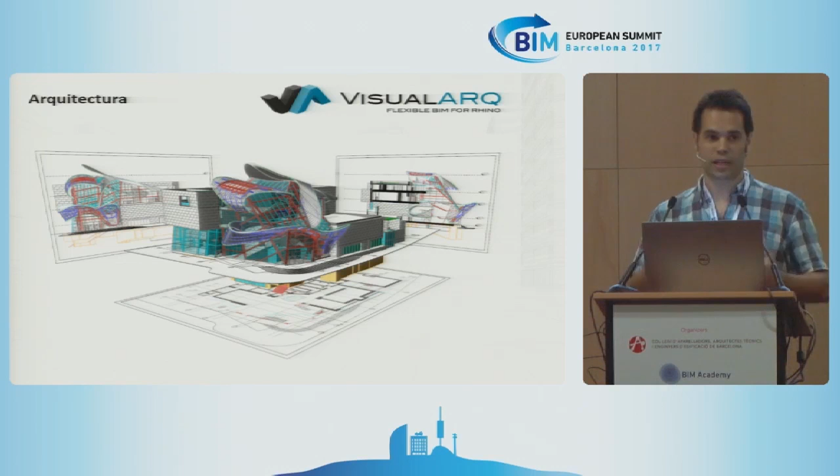Well, thank you very much, Oscar, and also to the organizers for allowing me to be here and to share with you VisualARQ. It's a program based on Rhino, and I'm sure many of you are already familiar with it, and also Grasshopper. For those who don't know, Rhino is a 3D modeling platform that is useful for other developers to add more apps and functions. These may be apps for architecture, imaging, anything. Basically, Rhino is used in very different fields, from industrial design, boats, jewelry, cars, furniture, animation, shoe wear. So it goes from very small objects such as jewelry up to huge projects such as a building. So here you can see these functionalities of this platform that allows you to extract all the documentation regarding a project.

Why BIM? Well, because it comprises all the documentation, and all the documents are generated by or based on 3D models. Also, parametrical architecture objects, so we can list them and know how many of them are there, the volume, sizes, and so on, and add new information on each of them. It is more practical to work with these parametrical objects and say, I want it to be 3 meters long and not 4 meters long. And this is an improvement. Also, Rhino allows for model exchange through the ASC format or IFC format.

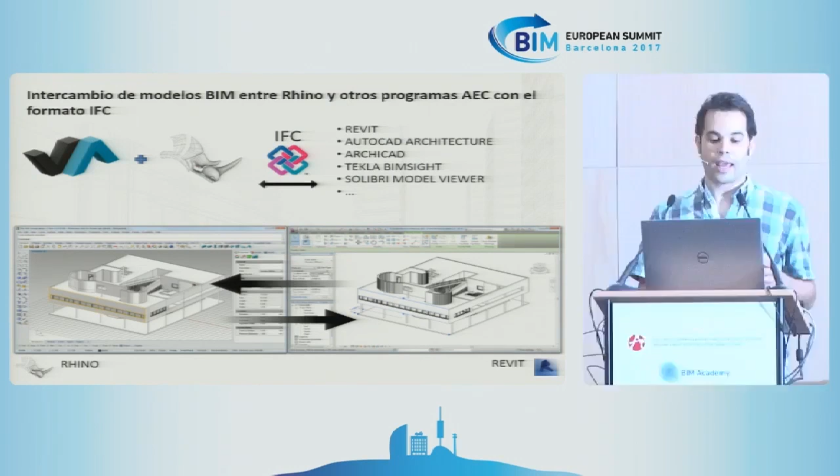I'm sure you are already familiar with that. So you export that to the IFC, and Revit identifies columns and models as native. So the workflow is very useful to begin modeling in a very agile way and for more complex models in Rhino, and to translate them to Revit so that other teams can work on them.

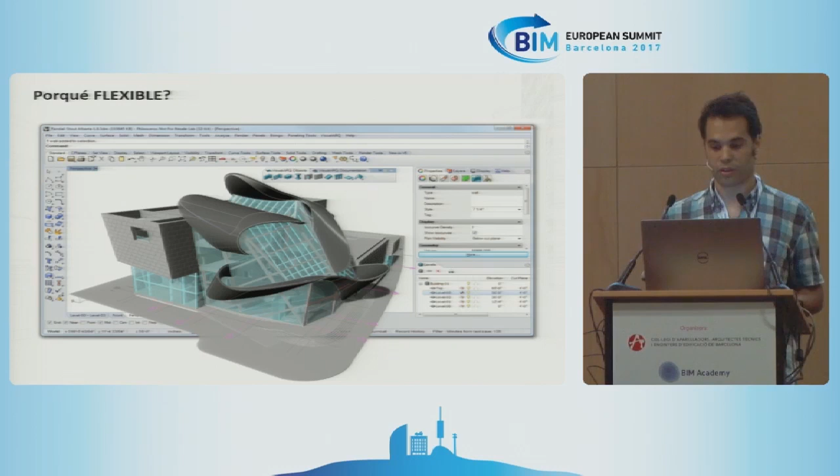Why do we talk about flexible BIM? Because we work with flexible and complex shapes. With very few control points, we get full precision. So this is used in construction for modeling shapes that are later 3D printed. And it's also very useful for complex geometries. Flexible also, actually, for the ones not familiar with Grasshopper, is a visual algorithmical editor, and VisualARQ is integrated in Grasshopper. All the objects of VisualARQ can be created from Grasshopper. In this example, you can see a routine, a general routine in Grasshopper, and from a solid you get the height, and it's divided into a number of points. A plane is set into each point and generates an intersection with the original solid.

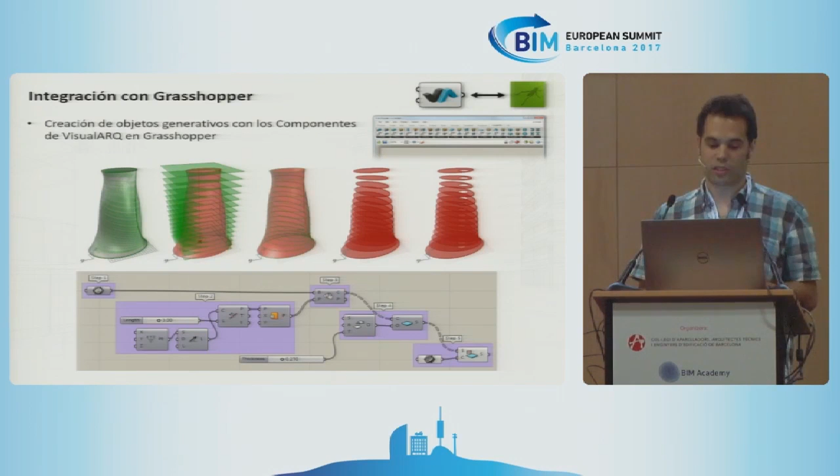From here you get the lines around this object, and this means that in a very simple way we can divide a solid object into different levels or stages or floors. And you can create your own tools and routines of this kind of geometry. So the power of Grasshopper is huge when it comes to modeling. I will be showing some live examples for you to get a better impression on that. Another useful function in terms of IFC, on the one hand, we have normal objects such as walls and partitioning, but we can also create solids as this one, which has a more complex shape, and at any time you can assign information and data to that, like make it a forge, for instance.

So we can say that this has been a forge. We add a kind of comment or tag, and later on you can retrieve this information. This applies not only to objects per se, but also to any kind of geometry in Rhino.

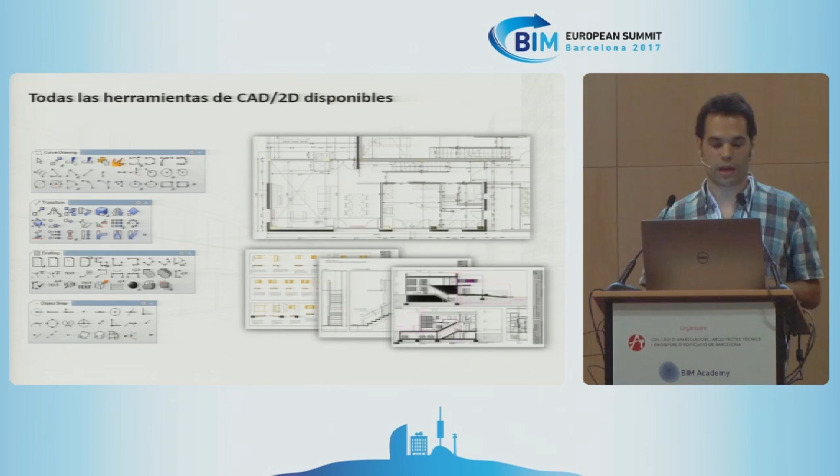It also has available all CAD or 2D tools, and finally, all the tools for architecture visualization, renderizations, and photorealistic visualizations.

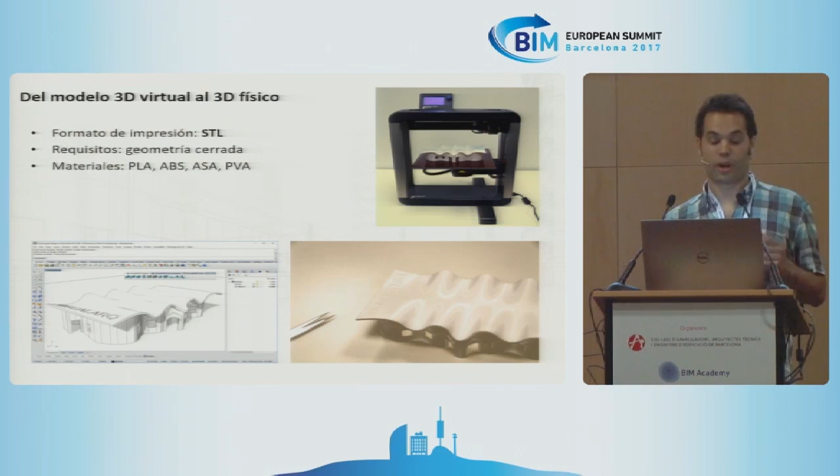One of Rhino's applications is to elevate these models for 3D printing. At the end of the day, what you need is a closed surface, a closed solid, so that the machine reads it as such. VisualARQ objects can be converted, and with a Boolean union, you can convert them through the STL format, which is the most practical, and bring it to the 3D printer.

I would like to show you some of the novelties that we recently launched, because I believe them to be really handy, especially if you work with Rhino and different levels.

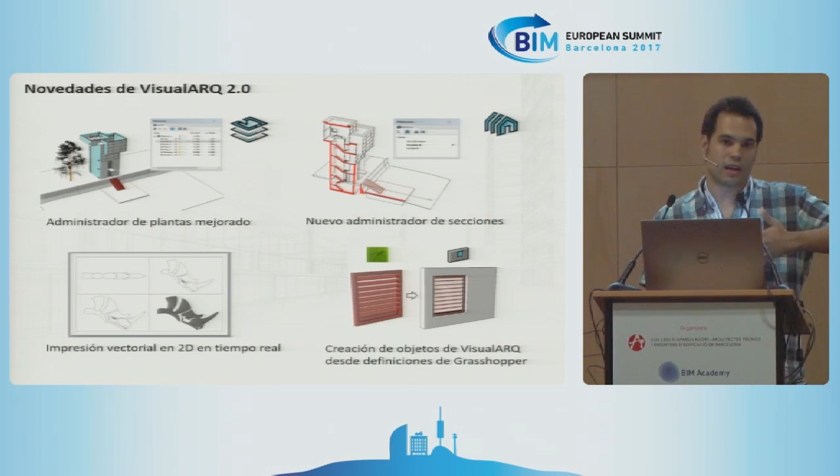I would like to highlight, especially in this new feature related to integration with Grasshopper, the ability to create architectural objects from Grasshopper, translating and transferring this flexibility through the dialogues of VisualARQ, for them to be more user-friendly and to have a vast library of objects.

We continuously add new objects, both in 3D and on paper or 2D. And as I said at the beginning, you have the possibility to add any kind of information to any object, creating new parameters such as price, provider, thermal transmission coefficient, and so on. Anything you want to invent or create, you can complete these objects with further information.

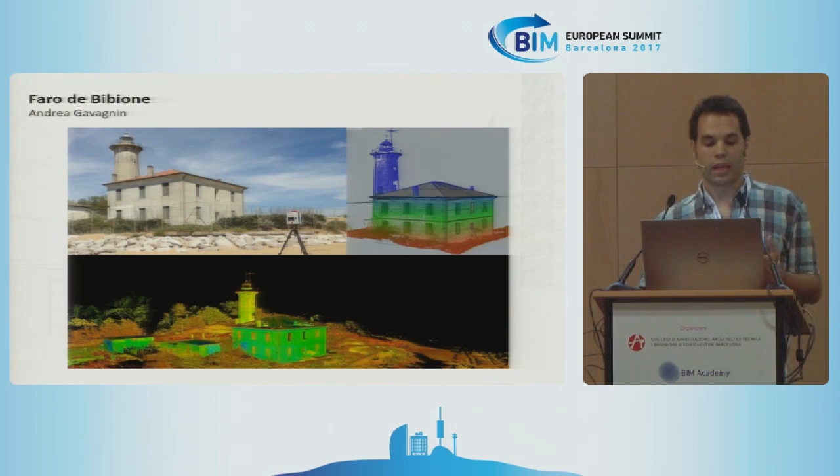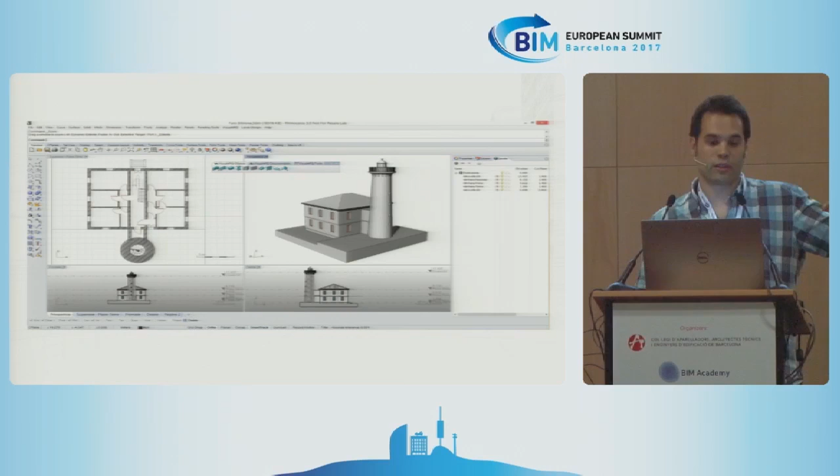I would like to show you some real cases completed with Rhino and Grasshopper, two very different platforms. The first is a project on an existing building in Italy, where this building was scanned through a 3D scanner. They obtained the point cloud through a Rhino plugin, and with VisualARQ objects, the model was built to get a BIM model delivered to the client, the town hall of the municipality of this lighthouse. The rest comes in automatically.

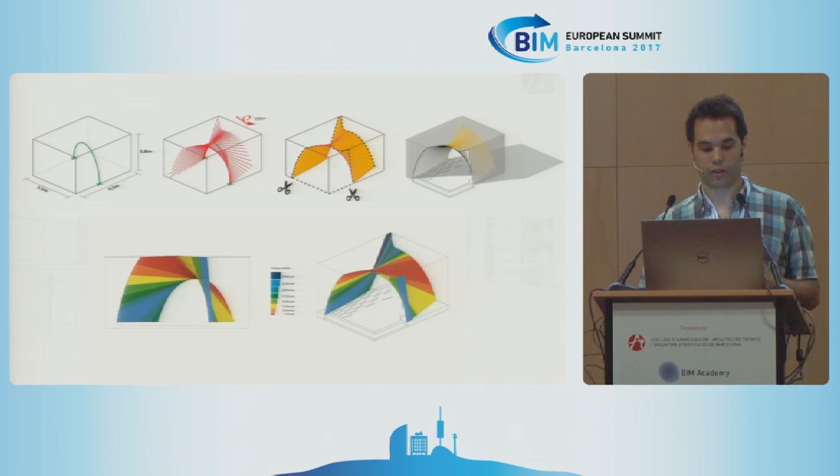Another example, changing the scale and kind of project, is this pavilion in Norway, which shows quite clearly the whole process from the design. Grasshopper is quite widely used in design. Through different values and parameters, you can get information from other components, and also draw diagrams to optimize construction. Here are some views of this pavilion. We applied VisualARQ to get all the plans and sketches, some pictures of the construction process, and the final result.

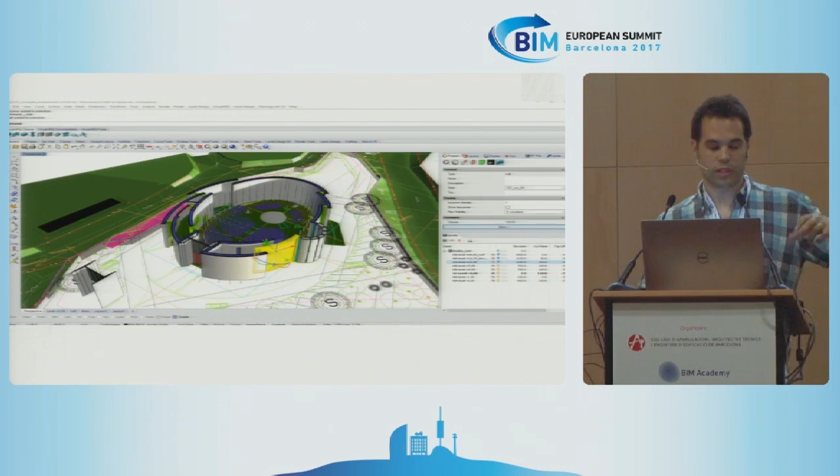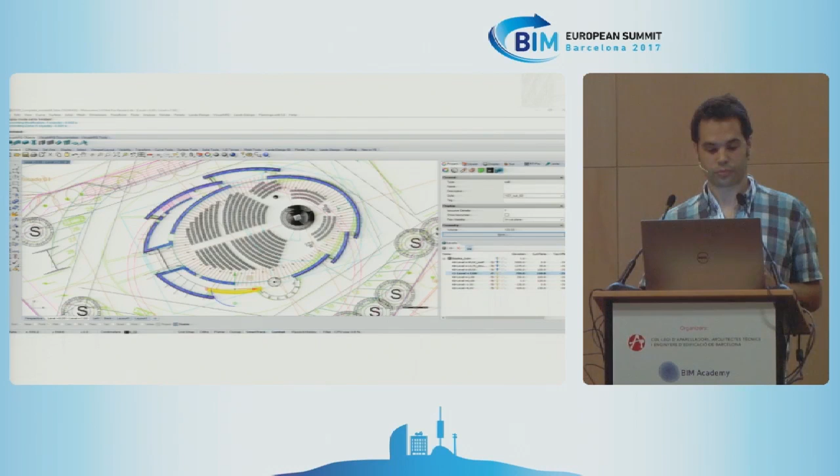Another example is a church in Croatia, currently under construction, created completely in Rhino and VisualARQ. We were able to work at different heights and stages, which was extremely useful for the architects. They could assign different kinds of partitioning and walls, working at different levels with corresponding graphical representation. Here we can see comparisons between reality and the graphical views.

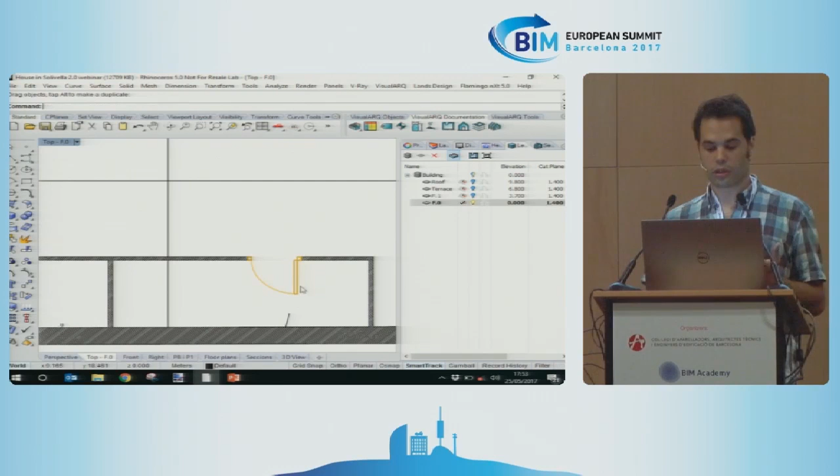Here I have a door, I can move it around, change its location, etc. I double-click to change the floor I want to show. And if I work from this view, it seems like a 2D representation, but it's not. This top view actually makes our life very easy.

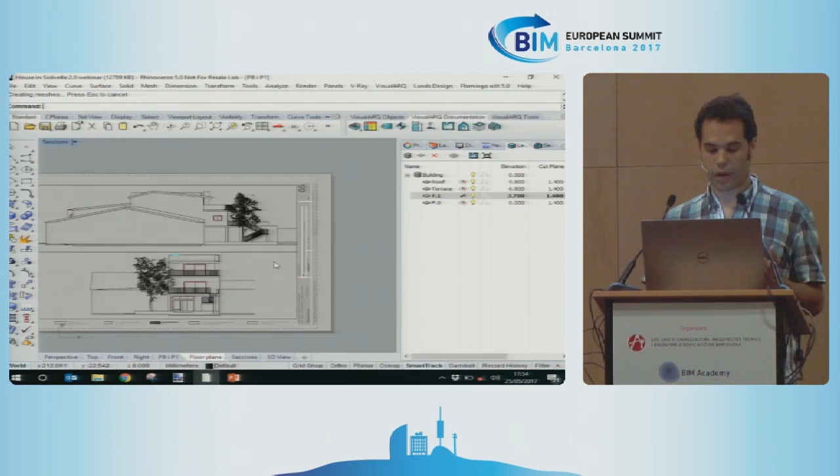There's also a section administrator or manager, so we can define different regions and sections and switch from one to the other. We prepare the different floors on paper and choose which floor to show, the ground floor, first floor, etc. The same applies to sections, let's say section B, A, or C.

We don't have to worry anymore about the 3D in these views.

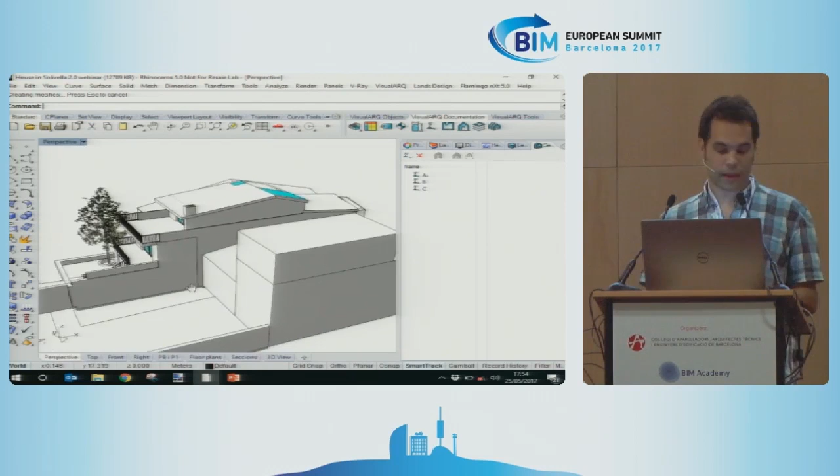Finally, I'd like to show this integration to Grasshopper that we currently develop. So I open Grasshopper. This garage door, for instance, cannot be created by VisualARQ. There's an option to assign 3D blocks to certain objects, but that block is static, not parametrical. In this case, for a garage door, if you want to have it, you have to use Rhino to create some blocks. So what we've done is develop the possibility to create it in Grasshopper.

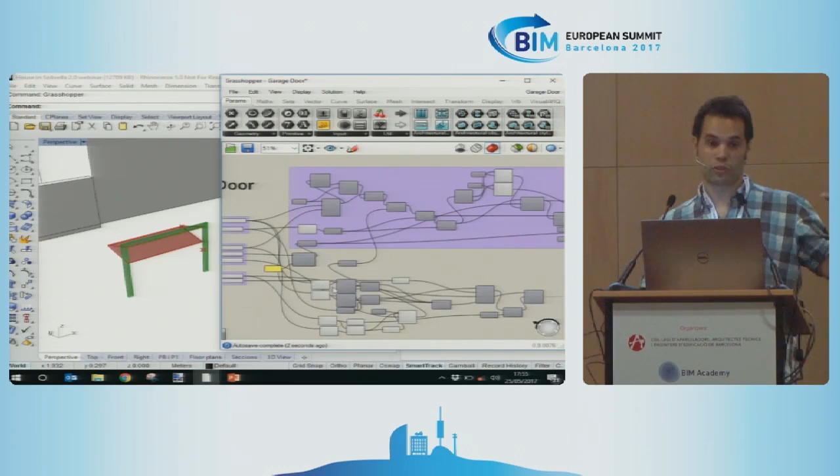Here we set the width and height, the opening - those are the input values. Finally, we have two geometrical components, the leaves and the frame. I click save on this definition.

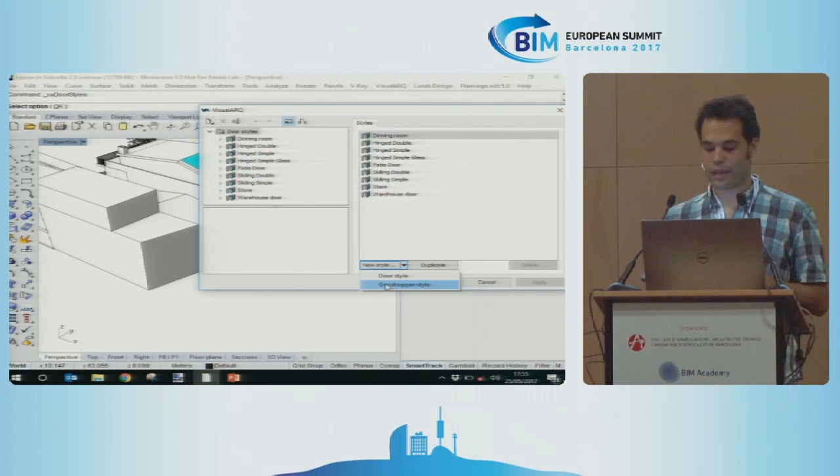And now I create a new door style. Here you can see there's a conventional door and the option to create this door from Grasshopper. So I select the file I just saved. This geometry is actually created by Grasshopper behind the scenes, even though we don't see it, using the geometrical components we included in the definition.

Here there's a list of all the parameters that define this object, and for each of them we can choose if they are editable by definition, style, or object, or just hide them, because some are just figure-related and not interesting for any particular case.

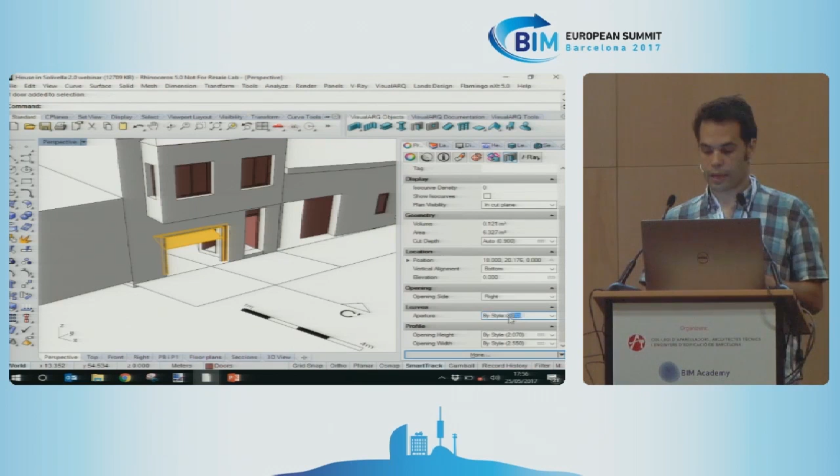Once we complete this process, this object is at our disposal and we can include it in our model. We can take a look at its properties and see they are the same as what we defined for the object. We can also modify it if we wish. This provides full flexibility to create any objects we want, freely and with no design constraints.

So I have no more time left. Thank you very much for your attention, and thank you very much.

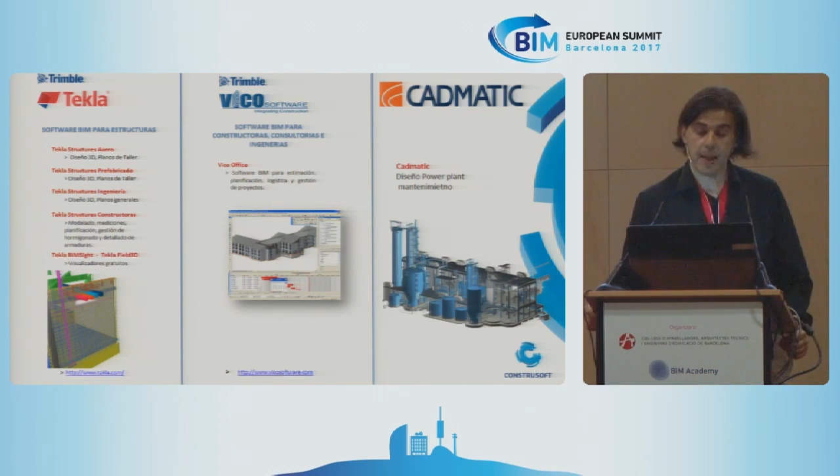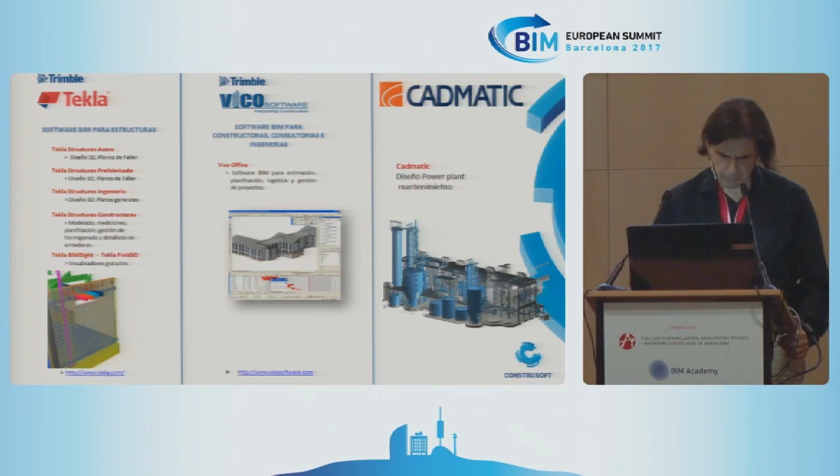We have always been related to the structure sector. There are three parts. We have been working with BIM since 1995, even before the actual BIM denomination was created. We work with models, that's Tekla. The part of managing structures, that's Tekla. The part that deals with 4D and 5D is Vico. And we have also added another software to our portfolio for industrial plants, that's Cadmatic.

We have six things I would like to talk with you about. Do you think that BIM and productivity go together? Is it the same? If I work with BIM, am I more productive? We'll talk about it later. We will also analyze a very simple work site. The following question is, who must perform the model? And most importantly, who must pay for it?

We have offices in Lima, Bogota, Santiago de Chile, Barcelona, Madrid, and many clients say, well, we are not paid for this, who should do that? And many times we don't really talk about who should pay for the model.

We will also talk about, as Oscar mentioned, I got a certification from Stanford in VDC, and Martin Fischer, who was a professor of mine at Stanford, will be here tomorrow. You cannot miss his presentation. So we will talk about how we work with virtual design construction. Also, we will talk about information for the construction company, and we will cover some already performed experiences in America.

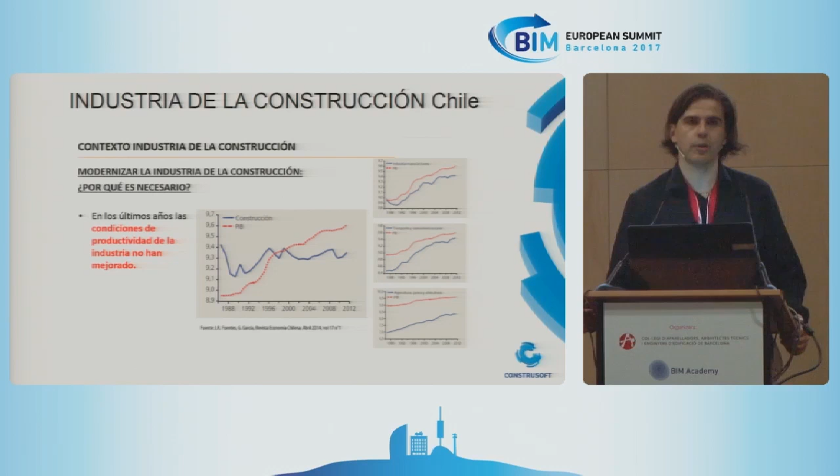So let's cut to the chase. BIM and productivity. The Chilean government actually carried out an analysis, and we see the blue horizontal line. We see that productivity does not really grow, but other sectors are growing. So why don't we have more productivity in construction, when other sectors do?

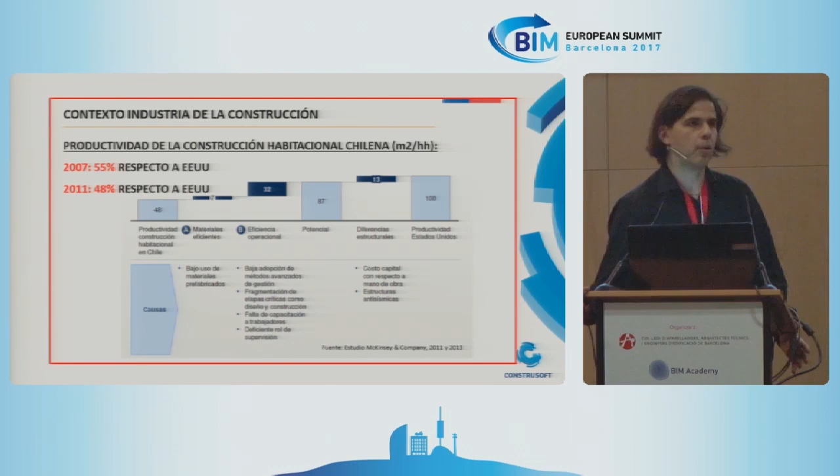Then they compared it to the United States. In 2007, we assumed that if the United States had 100 units, Chile had 55. We checked again in 2011, and we went from 55 to 48. And they wondered, why is this happening?

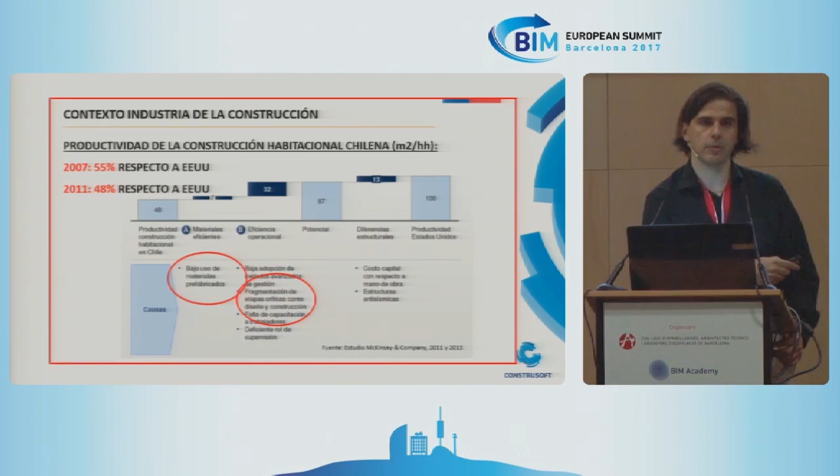The conclusion is that we need to prefabricate, and also they concluded that if information is segmented and fragmented, it does not work. So if you use any platform, the coolest 3D system, but you end up working with paper, you will have the same productivity as 50 years ago. Maybe you'll get better products, but the productivity will be pretty much the same. So if we use paper in any of the stages, we are back to the same productivity as 50 years ago.

Let's focus now on a very complicated and complex project. Think about it. Okay, there we go. This is a home center item, such as IKEA furniture. I put that together with my mother-in-law. We got along really well, so it was not really a risky project.

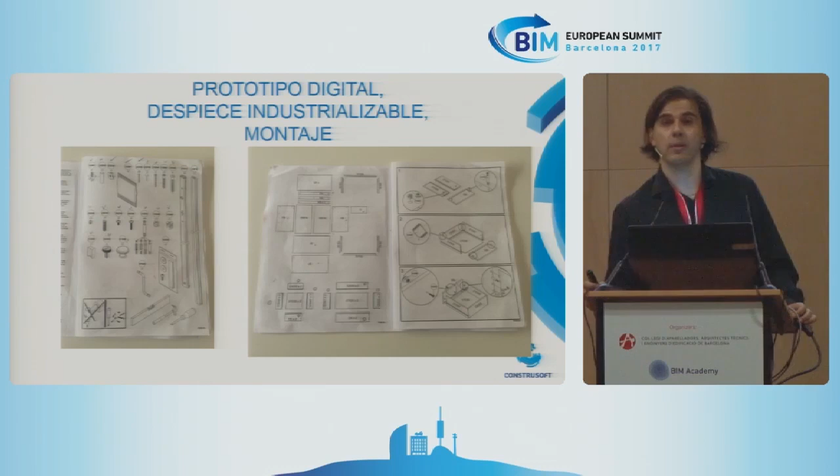But, you know, after we finished, I needed exploded drawings and also mounting instructions. Without the instructions, maybe we wouldn't have been able to do that. So imagine, if we need all the instructions in great detail for such a small thing, don't you think I will need the same for building a hospital, an airport, or anything else? And the answer is yes.

Do we have it? The answer is no. So basically, we are reaching a compatibilization model. We have a clash detection system. That's great. But it's like if we only had the 3D model for the furniture we put together. We also need the bolts and we need the mounting instructions.

We think that traditional BIM is cool. The platforms that are doing that are great, but we need to move further. We need to go beyond that. We need to have more detail. Maybe we can reach up to level 400, 450, so that we have all the information, and it goes from the model to the machine.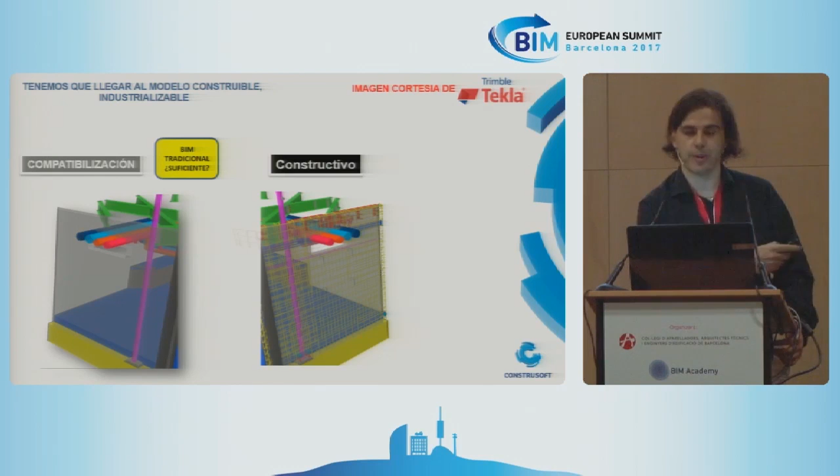Then we will change our productivity when compared to paper. So I would like to have the I of BIM, not only for information, but also for industrialization. That's the workflow. Tomorrow we'll hear about similar things, but when we talk about level 300, we are doing traditional BIM. As I was saying, we think this is what we need to achieve, where the subcontractor works at a very detailed level that allows us to bring the fabricated piece with a barcode, so that we can just put it in the right place and be much more productive.

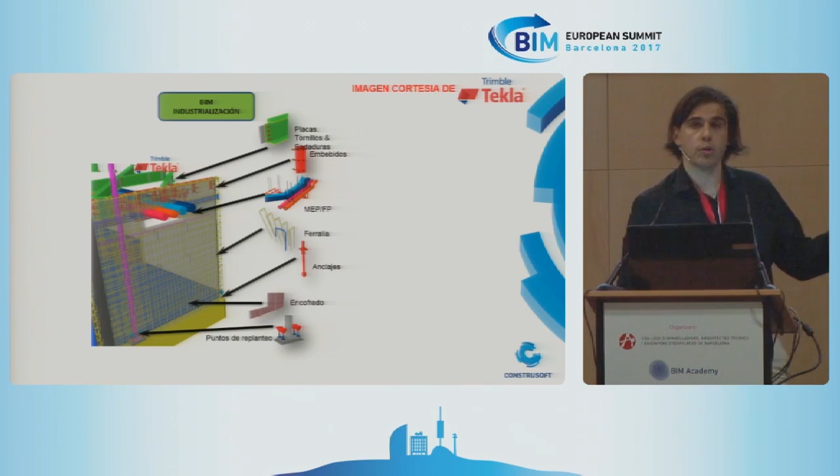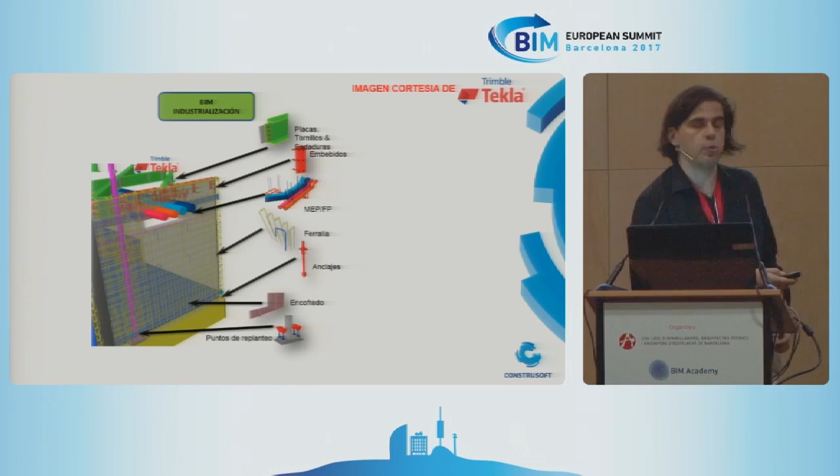So we will have all the embeds, all the installations, all the MEP, all the reinforcing steel, the anchors, all the rebars. If we have all this information, we not only have it from the beginning, but we have everything we need to plan the work the best way. Also, in the United States, they have the BIM tool that gives us layout points to check if the BIM is being used well or not.

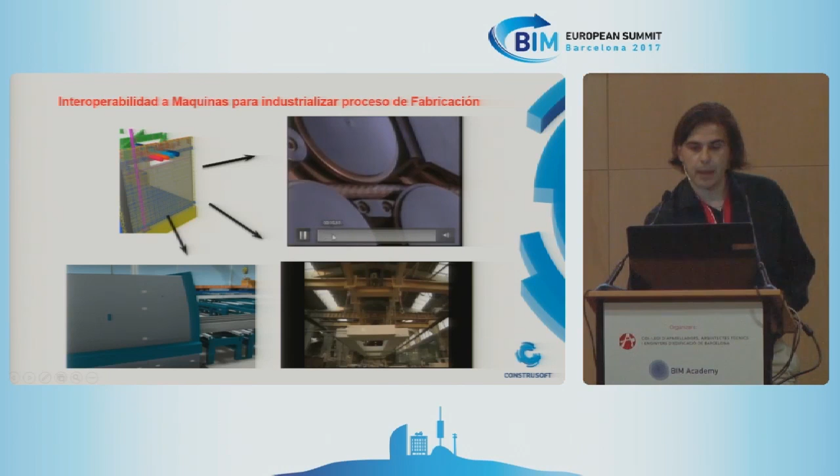For many years, our software has dealt with this structure, but for any specialty, we need to do the same. We need to achieve a constructible model, and hopefully also an industrializable one. From the model, we are able to reach the point where we can build the different components.

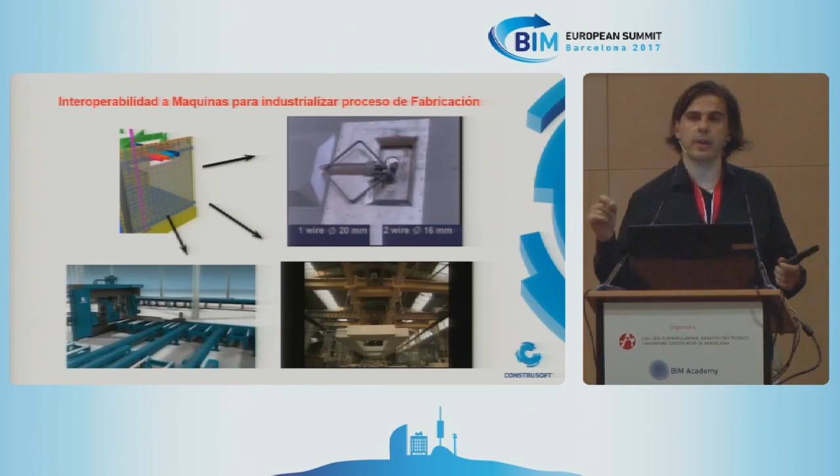A person can do 50 of these pieces a day, but the machine does several per second. For example, we can also have other clients in the steel industry. In this industry, each machine is connected with Tekla, and when we start working with the machine, we see that it already knows what needs to be done, and it's very precise. It's almost like playing with Lego.

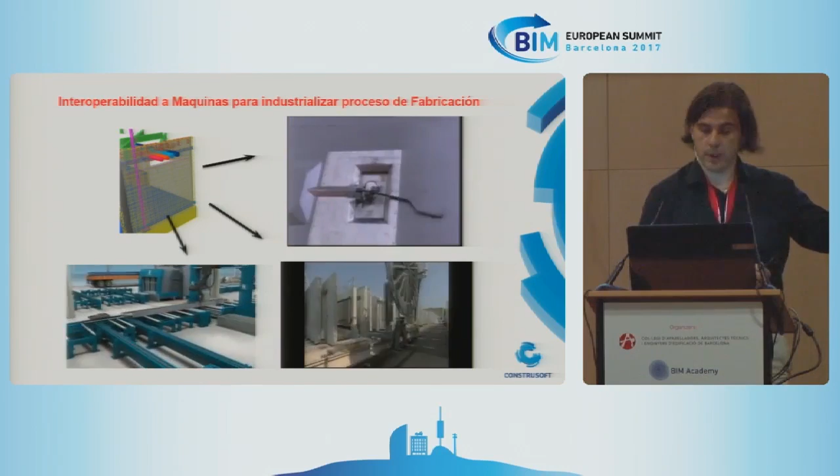Also, when we work with prefabricated concrete, it works just as well. In the past, we worked with paper, but now we're working with different prefabricated elements. So we listen to the diagnosis done in several countries so that we have larger productivity.

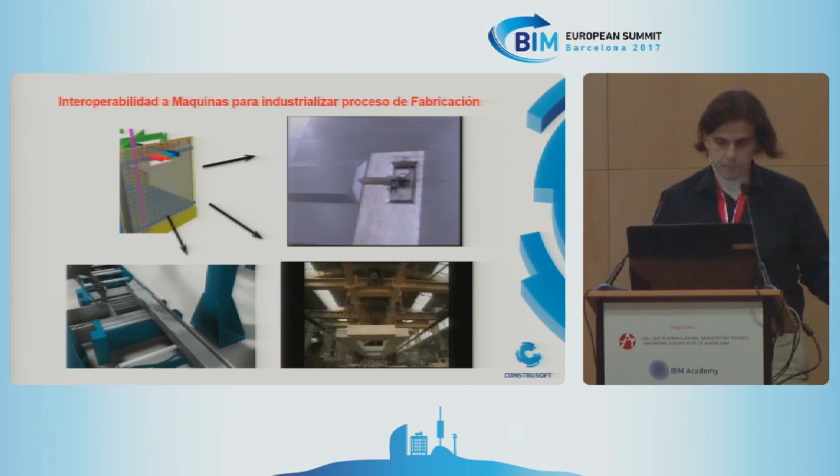Here, for example, we know exactly where the piece goes. We just put it together, we mount it, and that's perfect. The on-site work can last months, but the prefabricated work can just take some days.

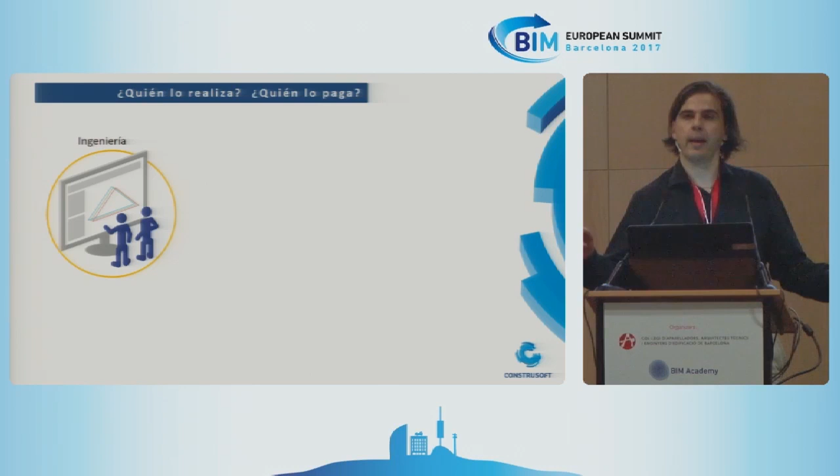So who pays for these? If we industrialize, we're more productive and it will work out fine. But who pays for that, and who carries out all the work? We have three possibilities: the engineering company, the provider, or the subcontractor.

Sometimes the engineering company does very high quality projects and we're done. But what happens is that many times engineering companies say they are not paid for that, so they don't want to do it. The construction company needs information to work faster, and the industrial side also needs information to work faster. So who pays for it?

In some countries, like the United States, the contractor pays for it willingly. But in our country, for example in Spain, we don't do it this way. Maybe we have the money to do the clash check, but that's pretty much it. So with construction companies, we see that 75% of the money goes to subcontractors.

It could make sense to say: I will pay you as much money, but I don't only want the project, I want the model, and I want it well performed, and I want to show how your product was done. That model will be useful for me to create other projects. In the countries where this is done, it works great. So we think it could be a good idea that the subcontractor does this work, not as an additional service, but just as added value. Do you think that could work?

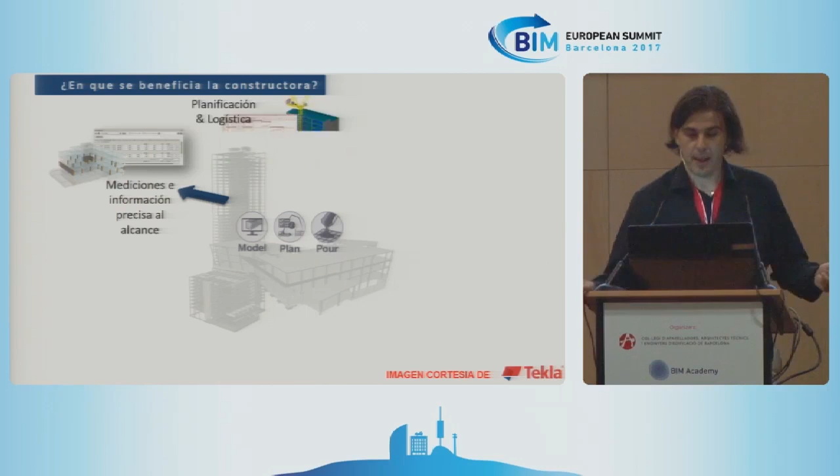Afterwards, I can do really good planning. Just by using barcodes, I will know where each piece goes. I will also be able to plan, and know what is needed every day on site. I can also do that with a 4D tool. I can plan when the concrete trucks will come, and I will know where the reinforced concrete must go.

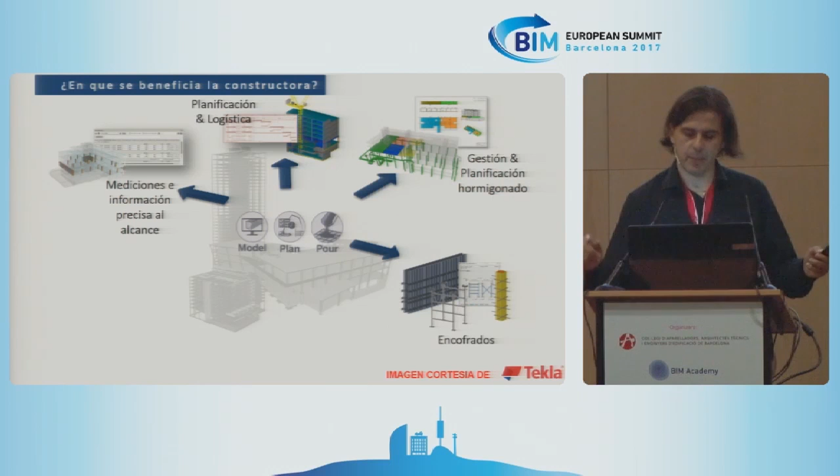The rebar is also important. I'm running out of time and I still have a lot to say. With the rebar, if I know where each rebar goes, I will not lose any part. So the idea is that we need to have everything really well defined, so I can just put the pieces together like when we play with Lego.

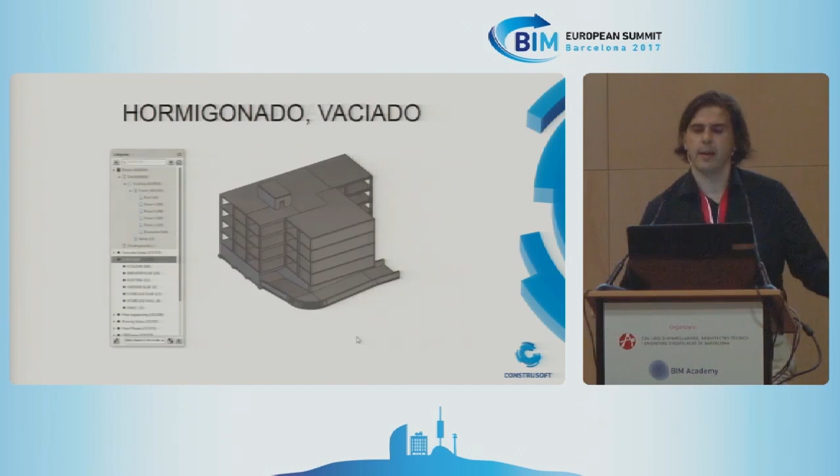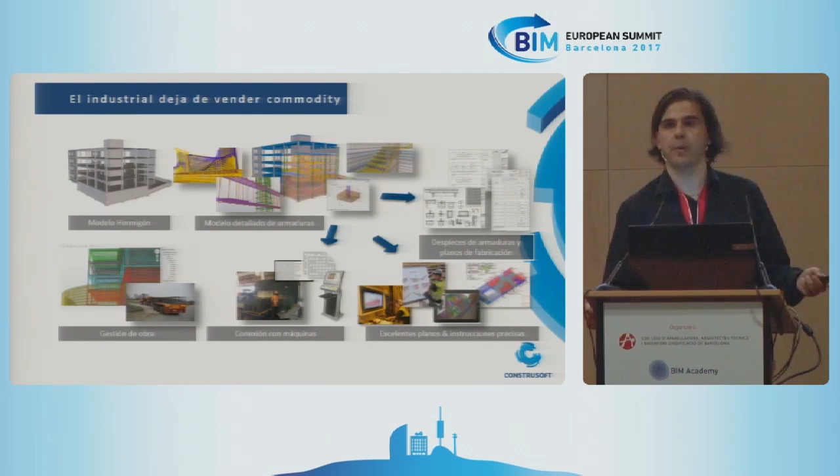With pouring, I can determine what I'm going to pour every day. Also with rebars, instead of having papers that really don't give me much information on where each element goes, these rebars show me a lot of information, and we save a lot of money. Here we have the production workflow from modeling up until the just-in-time delivery of the material we need, with the quality we need, at the moment we need it.

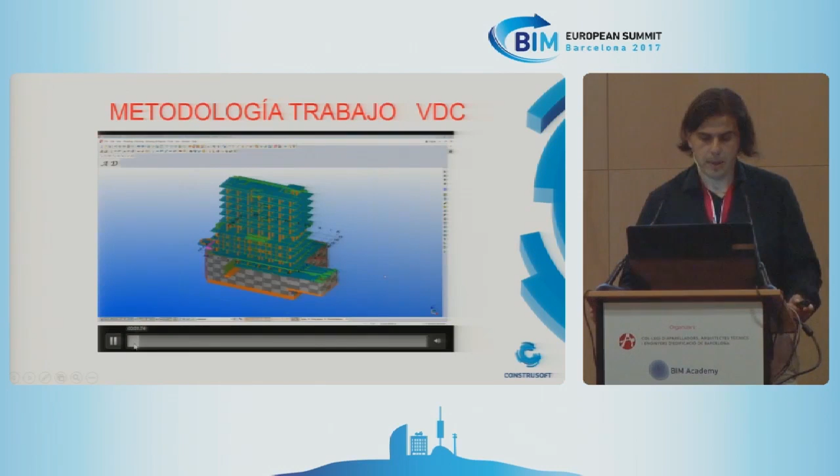Based on the Stanford system, we start with a clash detection. We do the modeling and we have all these specialties. We need to make sure everything is working out fine. Once we are there, we need to make it compatible. We will have the RFI. And just a little piece of advice.

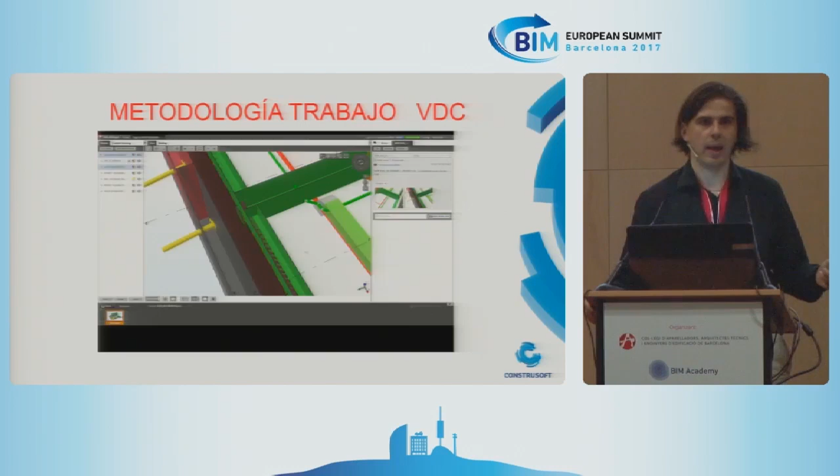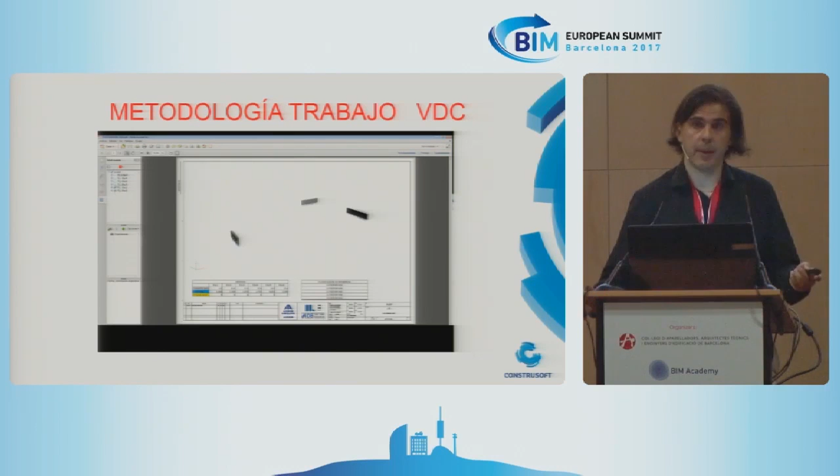We are working on 15, 16 projects right now as consultants. We need the industrial company to come and talk with you. We need all the different stakeholders to talk and make decisions about some clashes that will cost a lot of money. Then we need to decide how everything needs to be produced and who will do it better - that means more productivity. And remember, we're not talking about drawings anymore. Tomorrow, Martin will talk about some very collaborative meetings, with everyone there giving their own opinion about the workflow and industrializable material.

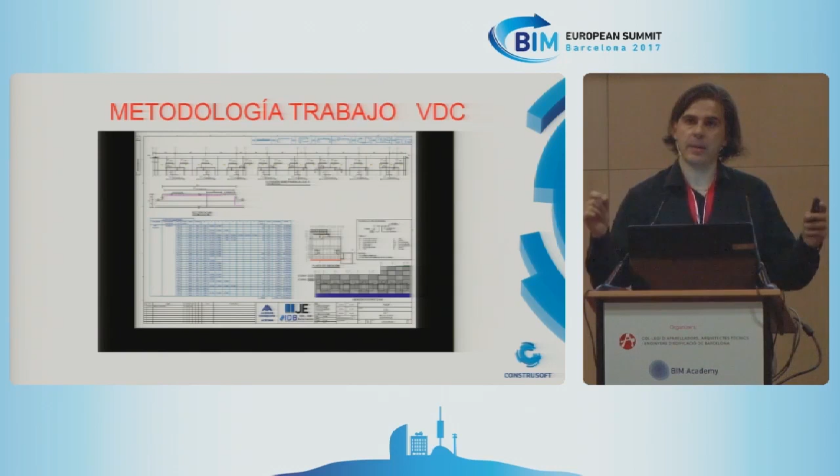This way, we will have all the different elements so that we can order the material the way that works better for us. Let's forget about paper. Let's also have the industrial company bring their components to us so that we can put each piece together when we want to use it. The model needs to get on site, otherwise it's useless.

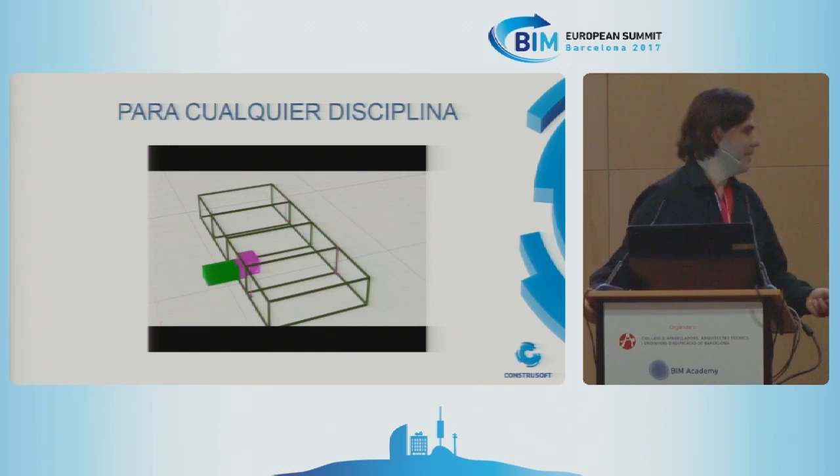Can I get a couple more minutes? So we're not talking only about structure. I also want to show you how the MEP and all the prefabricated stages help us here. This is what our clients do. This is what the construction company must demand from the subcontractors. This is the way you need to work, and that you will hear about tomorrow.

As associated information to the model, we will make some decisions on construction, but we also need to see this Excel sheet. Let's zoom in, but you will see that I have marked two columns in yellow. That's where the dates of when each stage is completed.

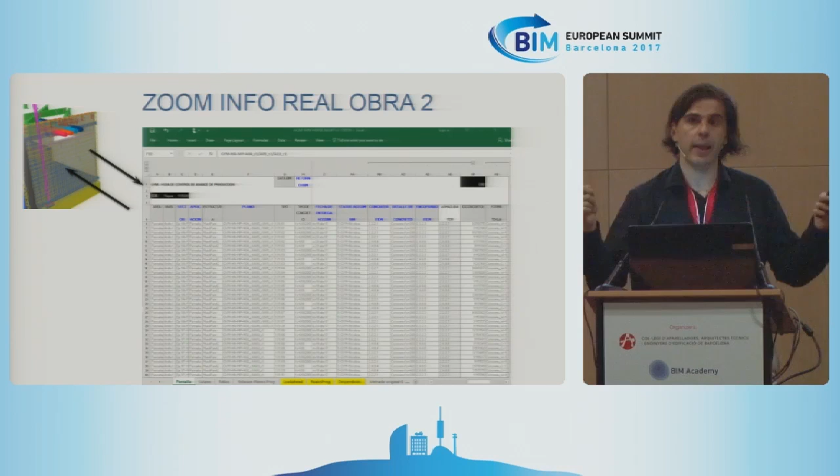At the same time, we also need to know about the logistics. We need to get information about the model, on-site and real. So we need to go to the actual on-site with the model.

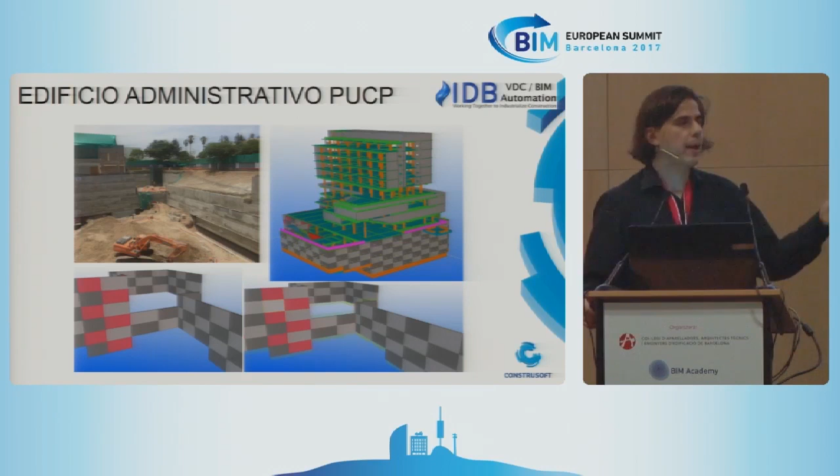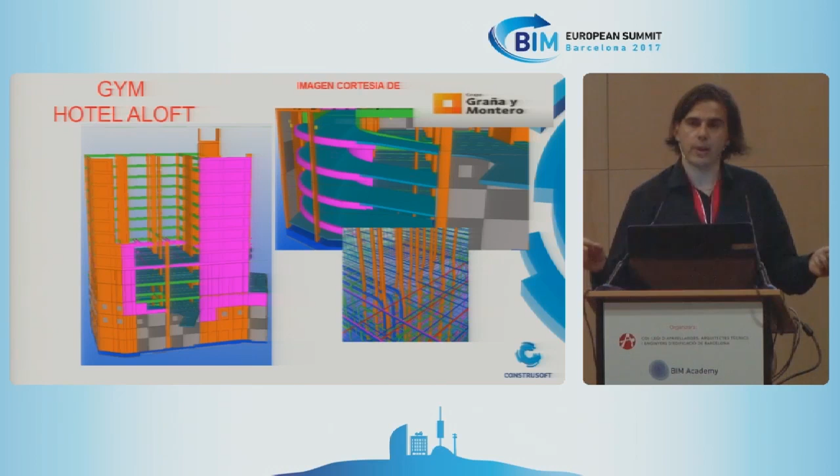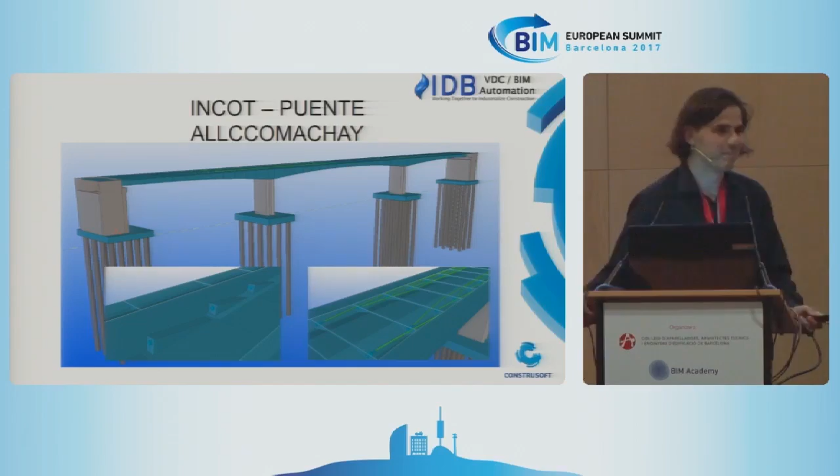The idea is to have real coordination among specialties, and someone needs to do the model so that the construction company can take it to the work site. You are invited to check more on this at our stand outside the room. Thank you.

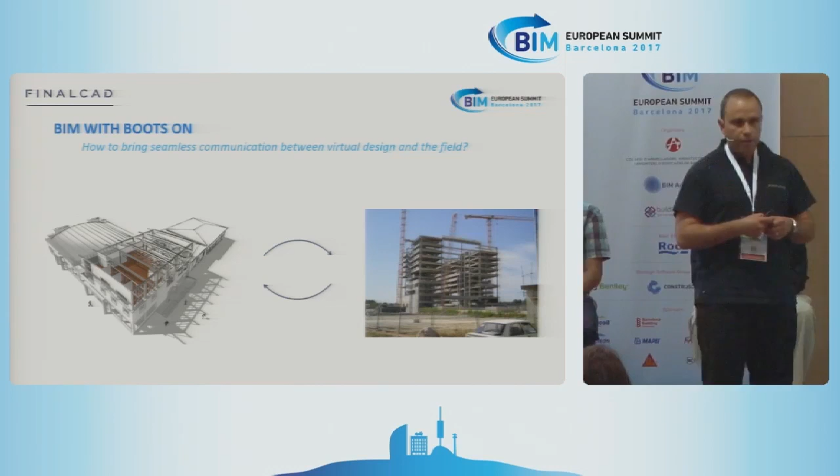But of course, BIM is complex, and bringing BIM to the field is not easy. So what I want to share with you today is a few rules that we've applied to ourselves to make sure that BIM can be used by anyone, in a way that is so simple it can be used by anyone. So the whole question is how to bring this virtual model that has been designed to the field.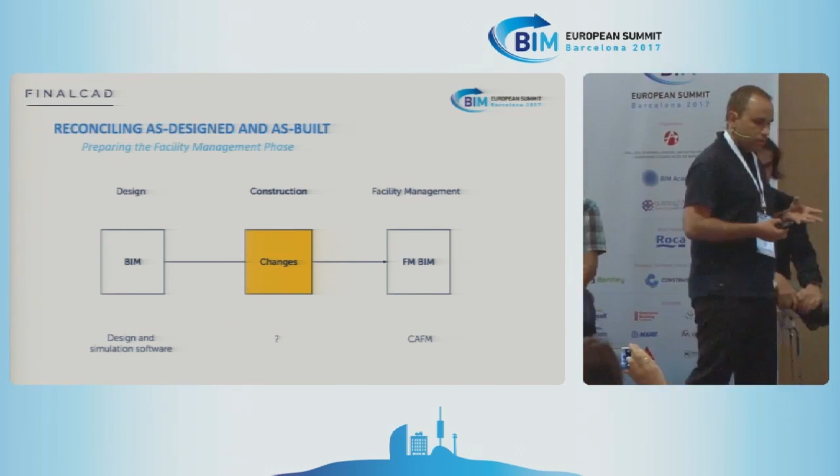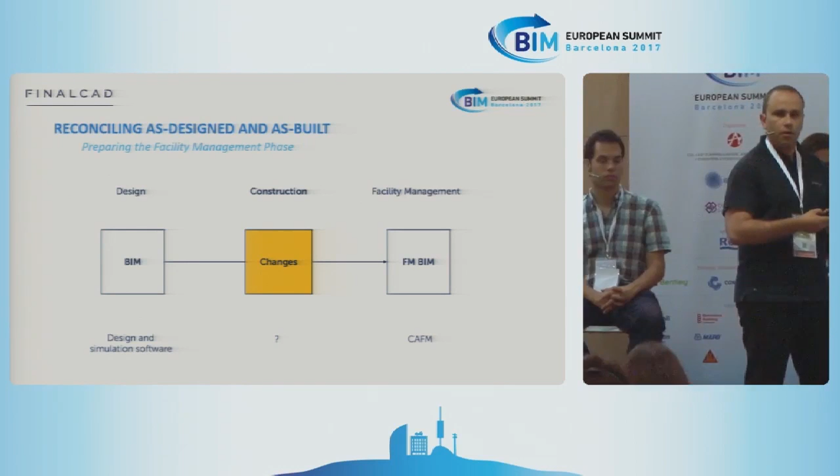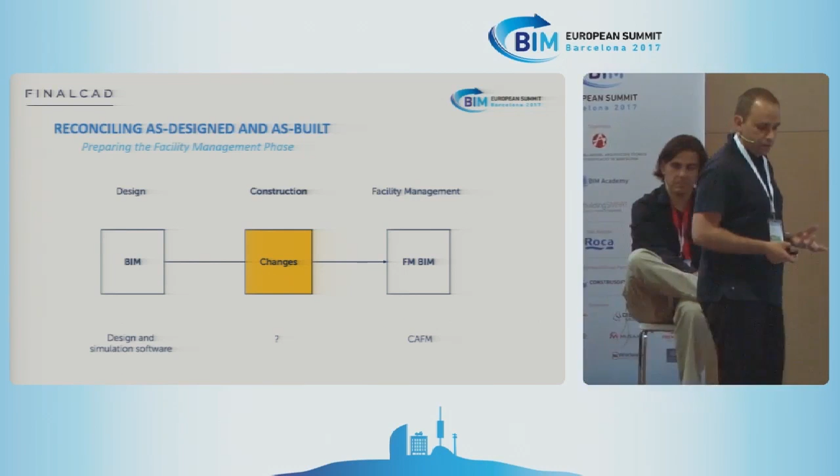Why is it interesting? Because to avoid this digital divide between design and construction, you might have a beautiful design in the BIM model in the design phase, but if you go back to paper blueprints in the construction phase, almost everything is lost. Then there's another divide between the construction phase and facility management when there's no data of the asset, no history. The contractor only thinks about his next project, and the facility manager has to find out where something is leaking or breaking, with no traceability, no history. So taking advantage of the construction phase, which is in the middle, to track changes is key to having a consistent virtual twin, or digital twin, all along the stages.

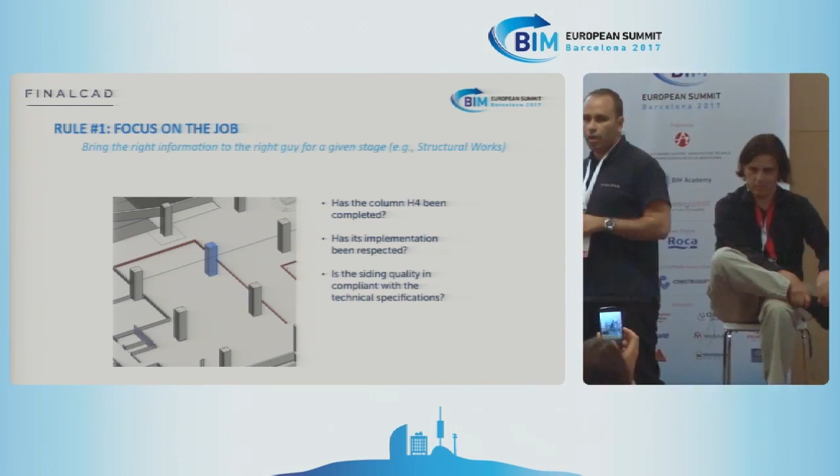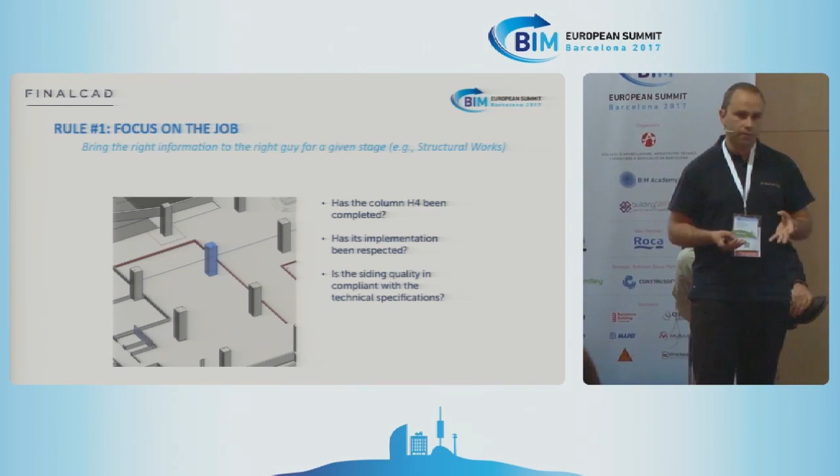Rule number one is we focus on the job. There are a lot of applications on the market for BIM on tablets or smartphones, but the problem is that they bring the whole model. That's great for architects because they know their own project and how to work with it, but for people on the field, this is way too complicated. So what we do is pre-filter and pre-select elements of interest for a given phase, for a given stakeholder, at a given time.

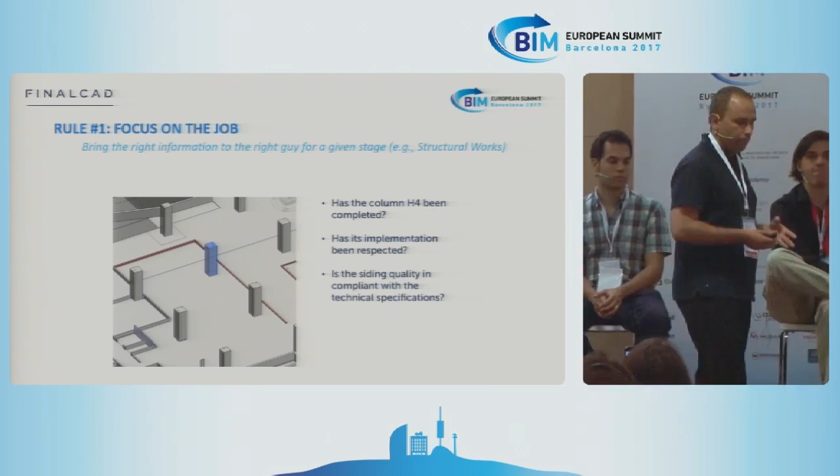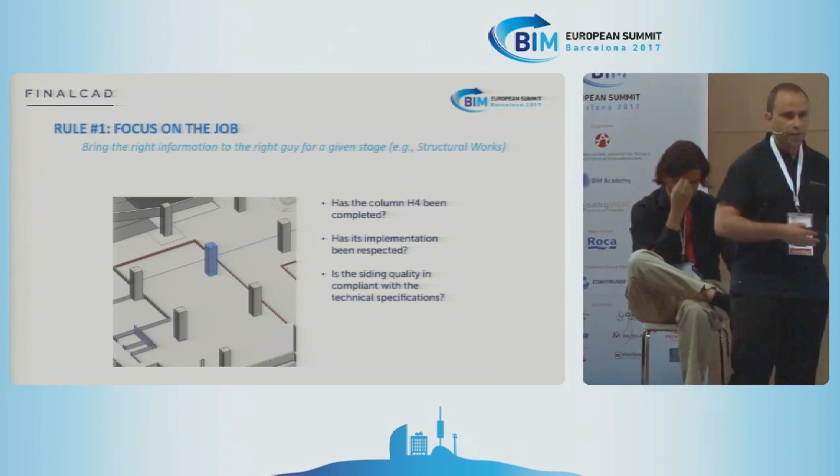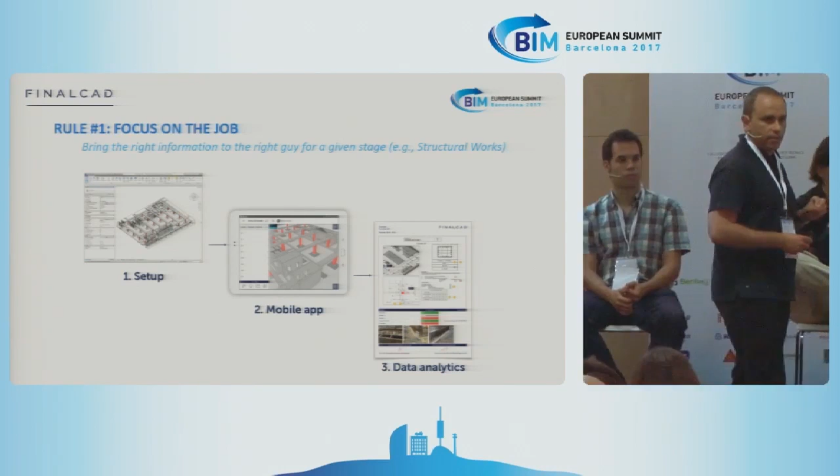For instance, here for structural work, let's assume we have to do quality control on those pillars. We select the pillars one by one so they can do quality control with the key questions: is it compliant, has the implementation been respected, are the dimensions okay, is the material okay, and so on. The way we do that is we've developed plugins on Revit that select all the objects and create the associated quality control or progress monitoring processes, which can be used directly on the mobile app, and that can generate data analytics and reports.

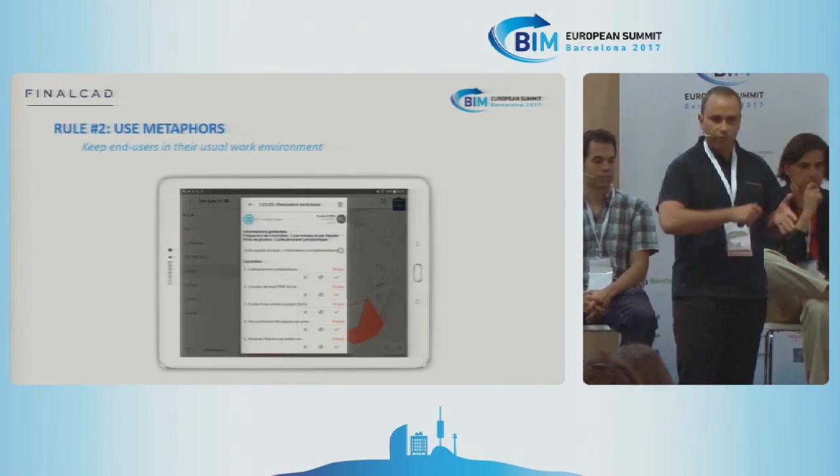Rule number two is to use metaphors. If we look at how people use paper blueprints today, a common way is to follow progress using Stabilo pens: red when it's not compliant, green when it's done, yellow when it's in progress. We did the same thing on the BIM model. So you can follow the quality control or the progress using the same metaphor as the Stabilo on the blueprint, except it's on the BIM model directly, and of course you can generate reports in the same way.

And of course, all of this is sent back to the BIM model, back to the office, where the BIM manager can follow over time and reconcile as-built with as-designed.

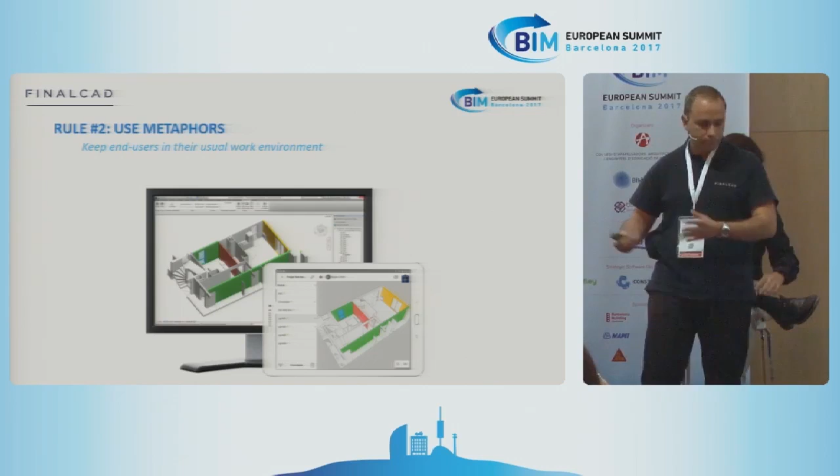Rule number three is to try every time we can to make it really, really simple. I'll show you three examples. The first is we've been using QR codes, because in most buildings, especially housing, or here a hospital, all the rooms or housing units look like each other, so it's really a pain to figure out where you are. Here you just flash the QR code, and boom, you're instantly brought to the right blueprint or model. Another one we developed, we got inspiration from what you have on your smartphone.

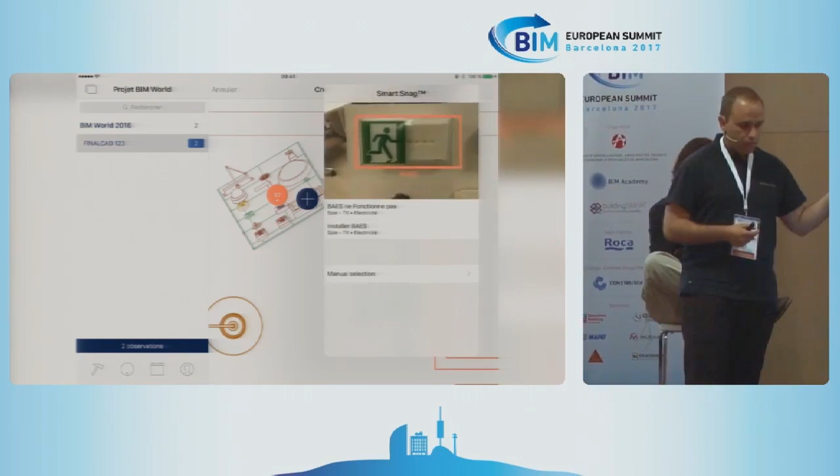When you take pictures of people, it automatically recognizes their faces. We did this using the same deep learning algorithm to recognize objects in a building. The advantage is it does predictive analytics on the most frequent corrective action associated with that object. So for instance, with a security block, it would probably suggest replace, change, or fix it. Like when you type in Google and get suggestions, it shows the most likely corrective actions.

So really simplifying the work. The last example is, instead of having defects marked on a blueprint or BIM model, we developed with Google Tango technology, an infrared technology, and Flux.io, an app where you can directly see with augmented reality and place the defects you're spotting directly within the app. From there, you don't even need to know how to read a drawing or a BIM model, you just point where the defects are. I don't see what we could do that's simpler than that, and of course this goes back to the BIM model.

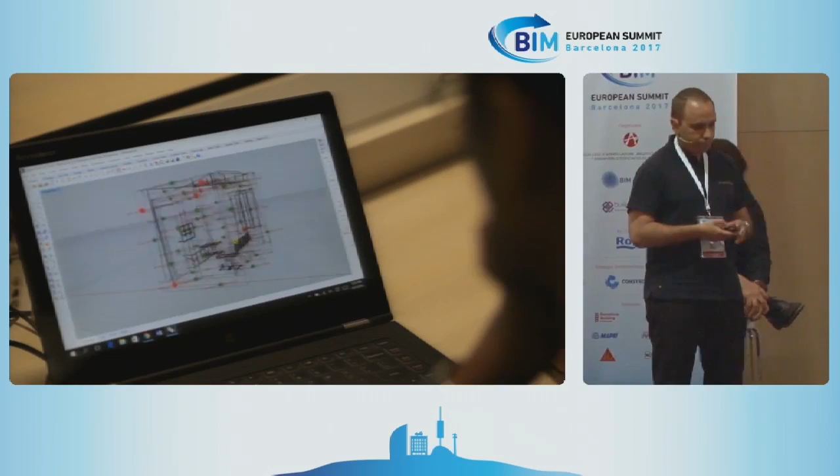So really make sure that this is as easy to use as it can be.

Now the thing is, in theory, BIM is about design, construction phase, and facility management. The truth is that as of today, BIM is still most of the time stuck in the design phase. It struggles to go down to the construction phase and then forward.

So are you ready to put boots on BIM? And as we say, we use Waze to drive today, and tomorrow we'll use FINALCAD to build. Thank you very much.